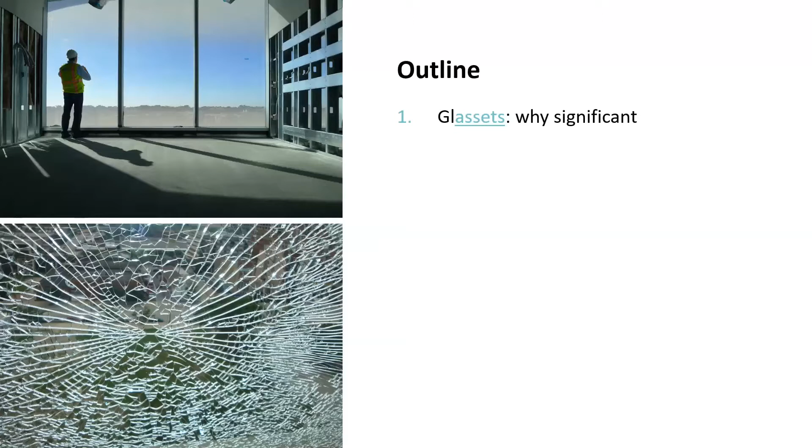Then we'll take a look at various causes of glass damage with the ever popular 'Believe It or Not.' I'm sure you'll be on the edge of your seat wondering what that consists of. Then we'll look at assessing the quote damage, or determining what types of blemishes are acceptable or not acceptable. And then we'll dive into the remedial options.

Stephen will then bring us to the point of analyzing how we can tell if the glass is still structurally adequate after polishing, and give some brief examples by way of a case history.

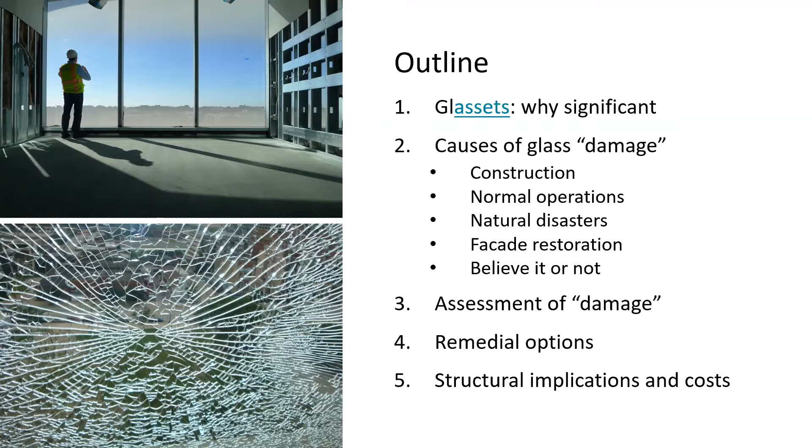So let's take a look at why glass assets are so significant. I cribbed this image of a building off the internet - it's a building in Hong Kong, but it will serve to demonstrate my purpose here. For many buildings, the envelope costs represent about 15% to up to 25% or greater of the overall building costs. So it can be very significant depending on the ornamentation and what we call jewelry on the outside of the building.

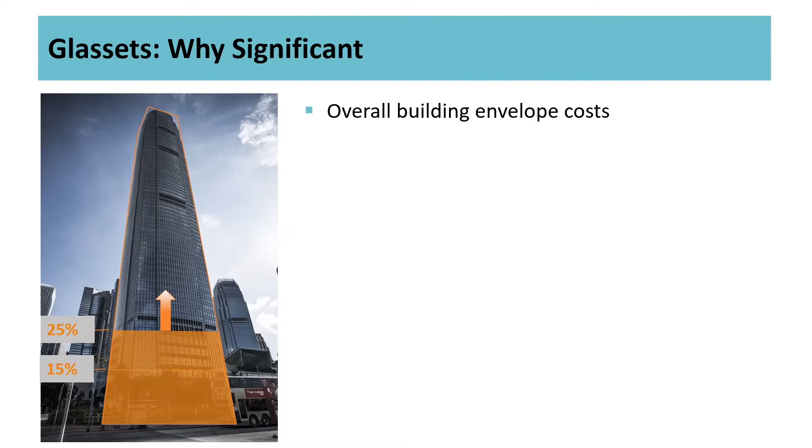A significant impact to that overall envelope cost is the glass. In recent years, for a variety of reasons, glass has gotten more complex. There's more ornamentation, more custom fritting patterns, more variety of fritting patterns on a given building, which drives up the costs. Then there are also different types of laminates, gas filling, and blast resistance requirements.

What we're finding is that on most projects, except for maybe a few recently sourced from China, there's limited or no attic stock provided at the end of the project to replace any glass that might be blemished or damaged. The glass becomes harder to match, with longer lead times, especially when sourced internationally. And the ubiquitous use of unitized systems with structural silicone glazing, and maybe some nearby high-end finishes on the inside, can make it very costly to replace any glass. So glass not only becomes an asset, but it can also become a liability.

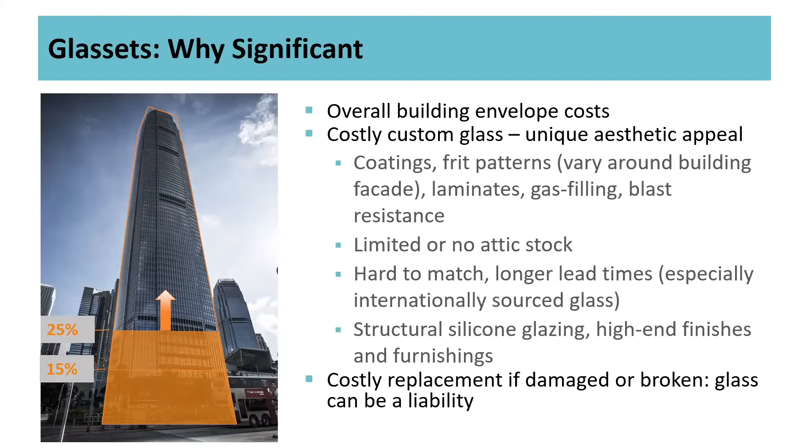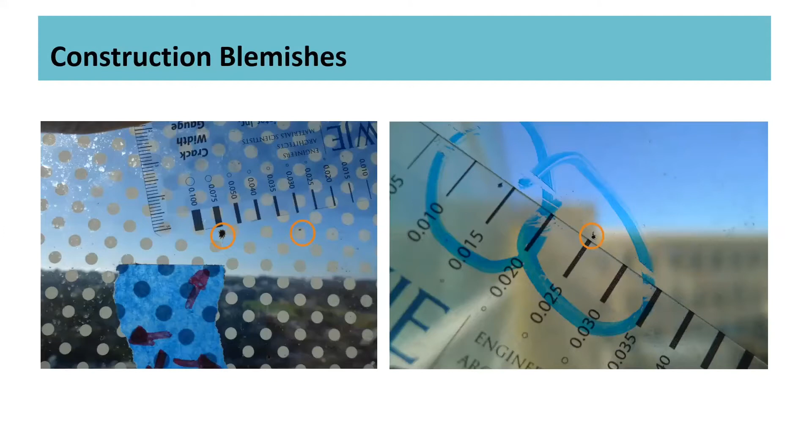Let's take a look at the reasons we're often seeing for glass blemishes. Some occur during construction. In this example, you can see small burn marks, pit marks in the glass surface - an example Stephen uses at the end of this presentation. That's occurring on glass that has a fritted pattern. The particular building had a variety of fritted patterns, which made it very difficult to get replacement glass for the project. So what caused those pits? Apparently the workers didn't think it wise to point the chop saw against the drywall and potentially damage it, so they oriented the chop saw and cut at a variety of metal studs instead, broadcasting small bits of burning metal against the glass - which of course doesn't play nicely together.

Construction cleaning, you would gather, should improve the overall appearance of the project before handing it over to the owner or developer. But we're finding that construction cleaning accounts for most of the construction blemish projects we get pulled into. Some of these seem pretty benign - we're zoomed in pretty far, and the scratches are pretty faint in these three photographs. There's some debris that's hit the glass in the left-hand photograph during construction.

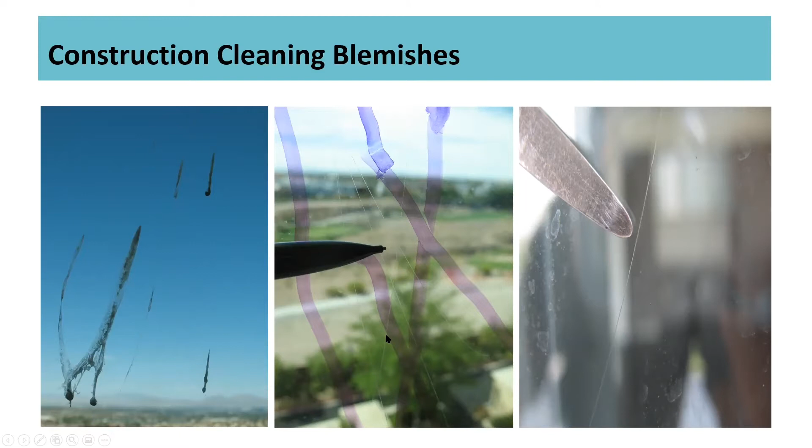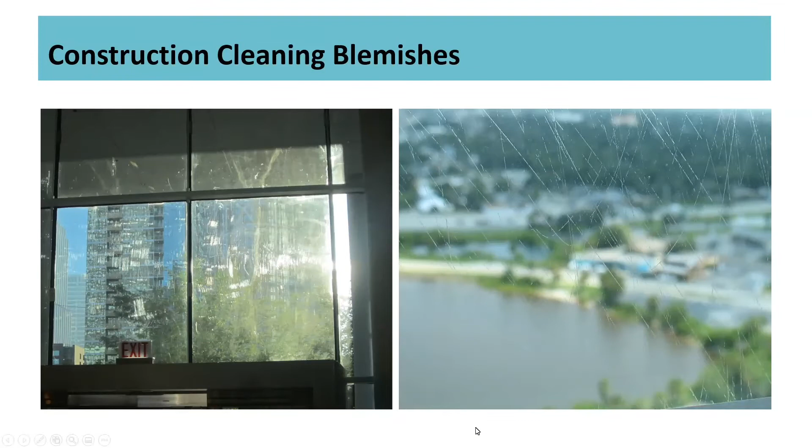But it can become very extensive. As you can see in the right-hand photo, under nondescript, cloudy day conditions, the glass scratches are very prominent. In the case on the left, we almost left the project without identifying any egregious surface blemishes until fortuitously the sun came down on the horizon and illuminated these - what we'd term angel hair scratches - on the glass, and they were widespread over the majority of the glass surface. So lighting conditions have a significant role in identifying scratches and blemishes as well.

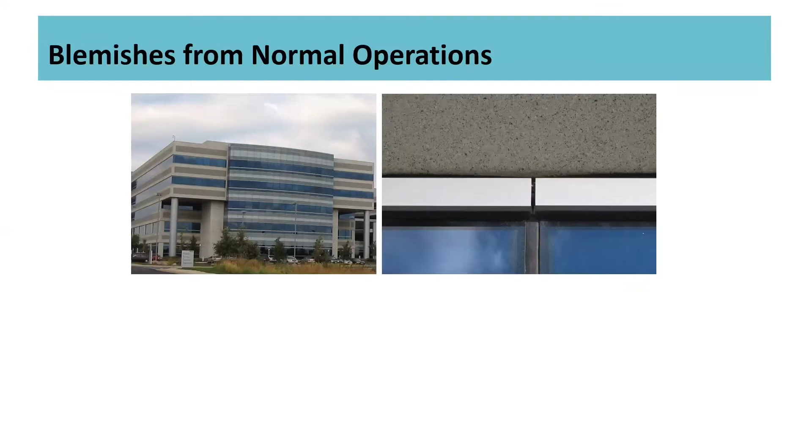Then there are blemishes that occur from normal operations. In this case, there's unprotected cementitious material - precast concrete - in the same plane as the glass. Rainwater runs over the surface of the concrete, leaches alkalis out of it, and deposits them on the glass surface. They end up looking like water spots, which you'd think might be easy to remove by normal window cleaning, but they can't. When we've looked at some of these projects in the laboratory under the microscope, we can see that the alkalis have actually etched themselves into the glass, creating a small pocket in the surface.

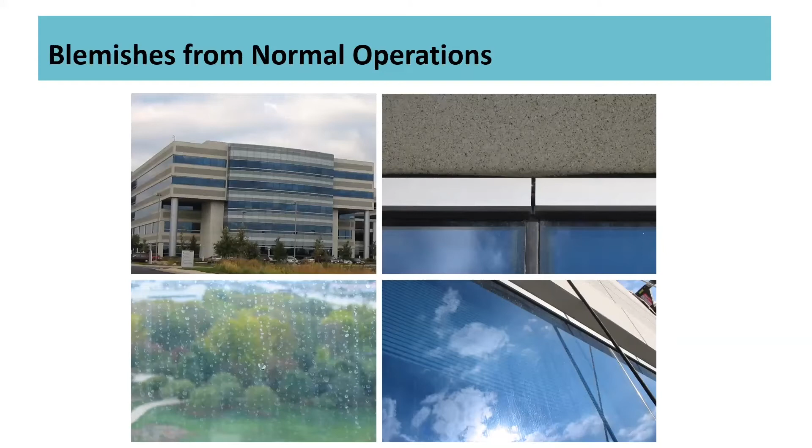In an effort to remove such water spots from the glass, this was a project where the owner-developer hired a cleaning contractor to remove those water spots. They ended up using a proprietary glass cleaning material containing silica - which we all know is a component of glass and has the same hardness as glass. They used it on the end of a handheld polisher, and you can see the overall pattern as they went across the surface. This was a mid-rise building, and the condition wasn't noticed until pretty much the whole project was completely cleaned and had these fine scratches - which ended up being very shallow, only about millionths of an inch deep.

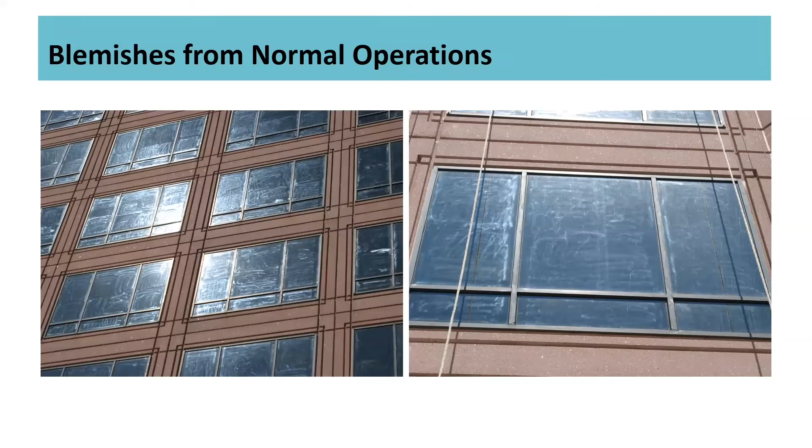Other types of blemishes can occur from natural disasters like hurricanes, tornadoes, microbursts, even derechos, a term few of us used before the last tornado season in the Midwest, where we investigated several derechos. The kind of debris or conditions you might see from natural disasters could look like this.

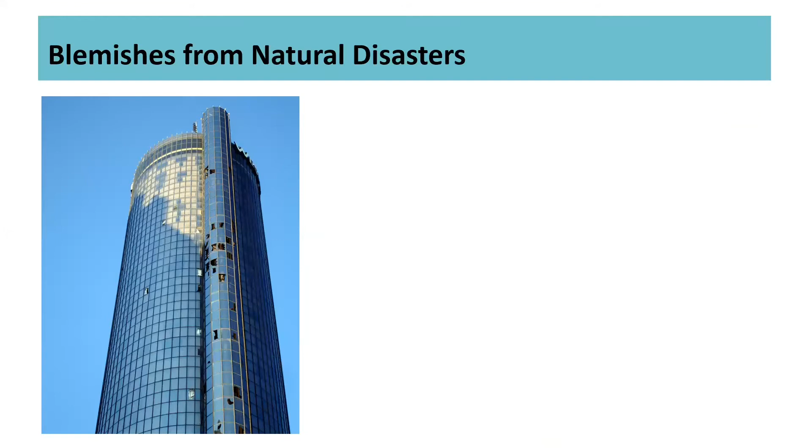But depending on who the occupant is of that particular space—if it's an office worker or a tenant who isn't just kicking up their feet and looking out the window—that type of damage could go largely unnoticed. Whereas if it's a multi-million-dollar condo owner, those blemishes become very significant in their eyes.

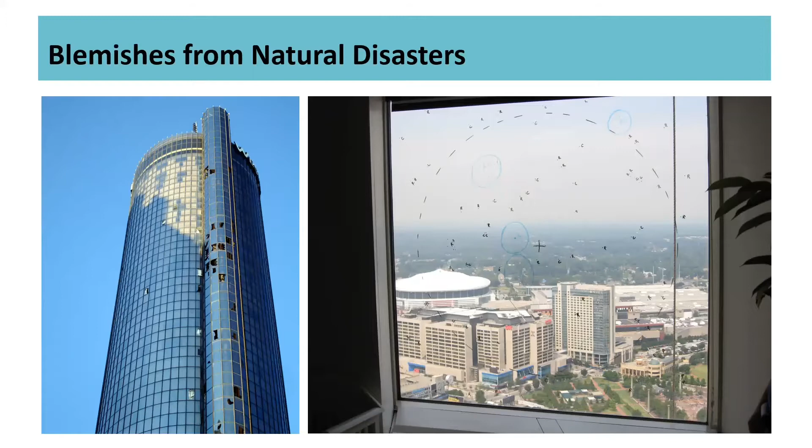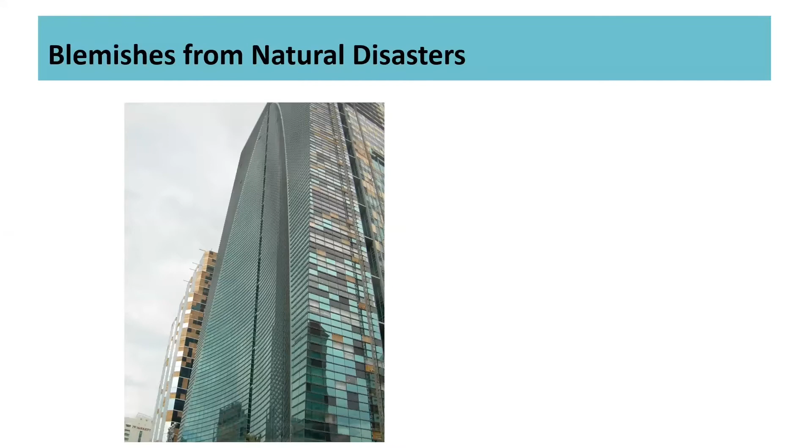Here's another condition where there was a building in the path of a relatively wimpy hurricane, Wilma, that came through Miami several years back. While that might look like different colored glass on the side of the building, it's actually boarded up windows because of extensive glass damage that occurred there. It was a brand new building under construction.

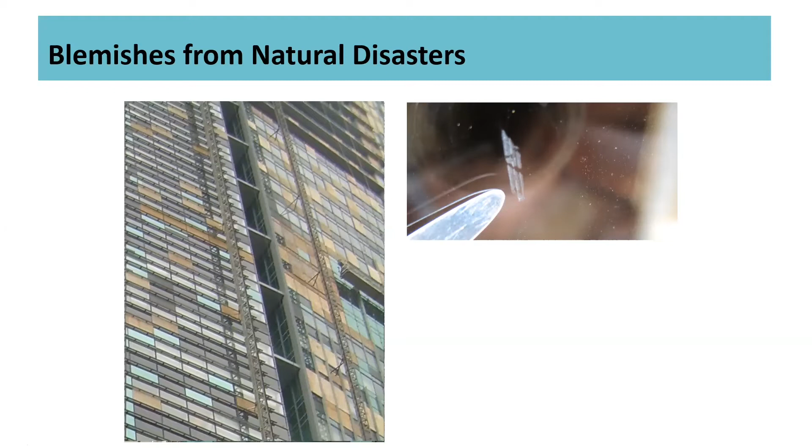Rubs are typically shallow abrasions that are generally wider than scratches, but perhaps not as deep as scratches.

Also associated with these kinds of storms with a lot of windborne debris are what we call crushes. They're a form of point blemish, resulting from small impacts of debris—in this case glass from the upstream hotel—that hit the side of the building.

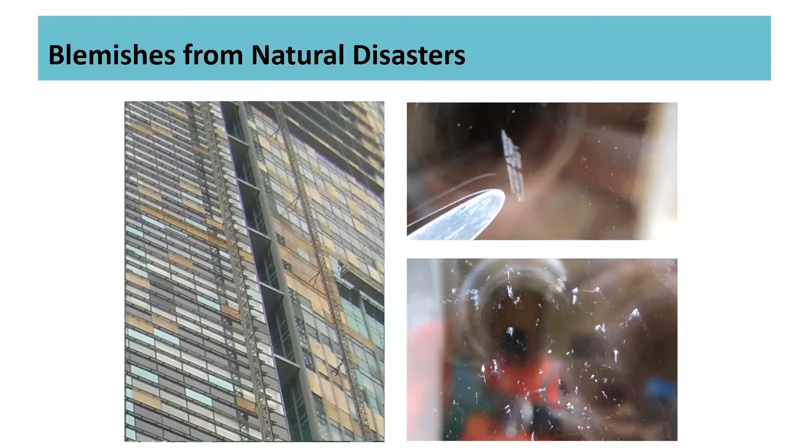We've also seen a lot of blemishes resulting from facade restoration projects, because on those projects you're using repair materials that can be cementitious, or paints or coatings, or a variety of things that can get on the surface of the glass.

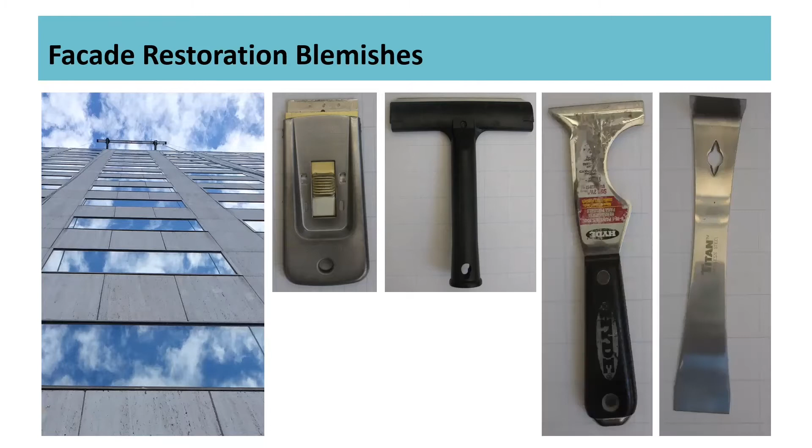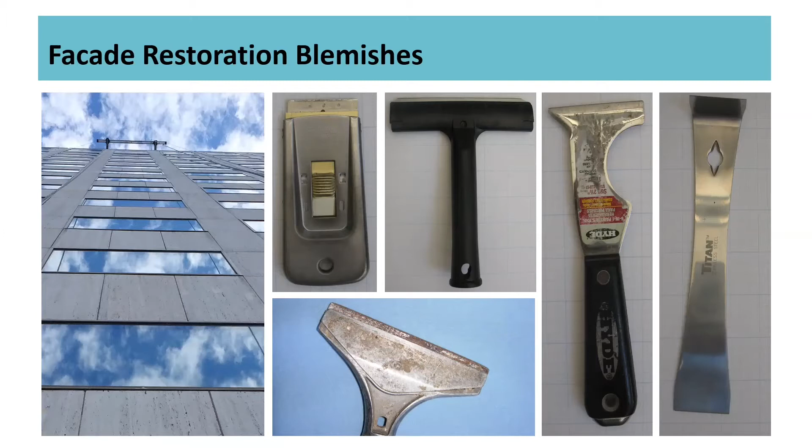But then there are pieces of equipment or tools you wouldn't expect: some 3-in-1 tool, a pry bar, and my favorite, the rusty tile scraper. Yes, that tile scraper is only really intended for use on floor tile, but it was used on a particular project, as we can see here.

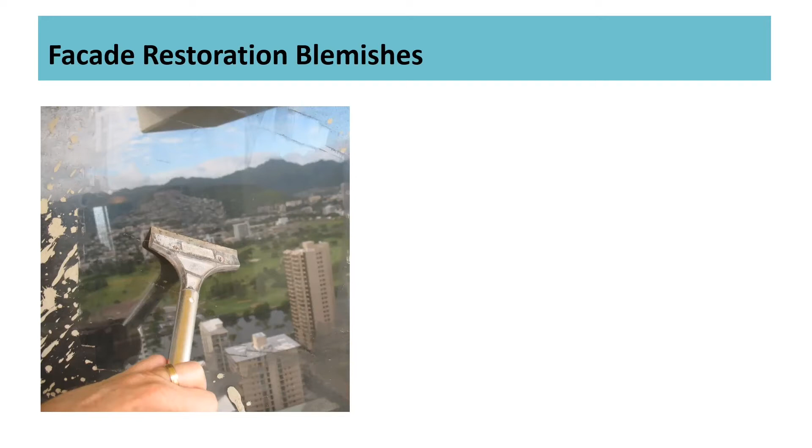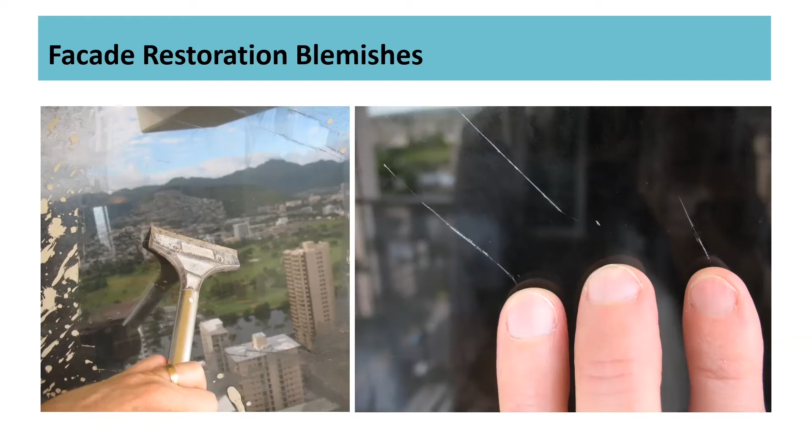The rusty tile scraper was still in the gang box of the contractor that cleaned the glass, and we still had some of the material used as part of the facade restoration project. So we broadcast that against the glass and used the same piece of equipment to remove it. Lo and behold, we were able to replicate scratches that looked very similar to the rest of the documented scratches on that project.

Lastly, under the believe-it-or-not category, there was an NFL football team out west not really accustomed to winning many games, but they managed to pull one out. An overly exuberant fan detonated fireworks in close proximity to some buildings, including the subject building, a mid-rise. As a result, you had these almost firework-looking little bits of metallic embedment in the glass, extending all the way up to and above the 15th floor of the building.

Now that we've taken a look at how these blemishes can develop, how do we determine whether they're acceptable or not? Well, there's only one standard currently available.

That's ASTM C1036. It's currently under revision—those standards are required to be revised every 5 years. There's been some discussion in the committees I've participated in about eventually developing a standard more suitable for use on in situ buildings. But nevertheless, the standard itself says it's applicable to field use, and it's the only one we have at this point in time.

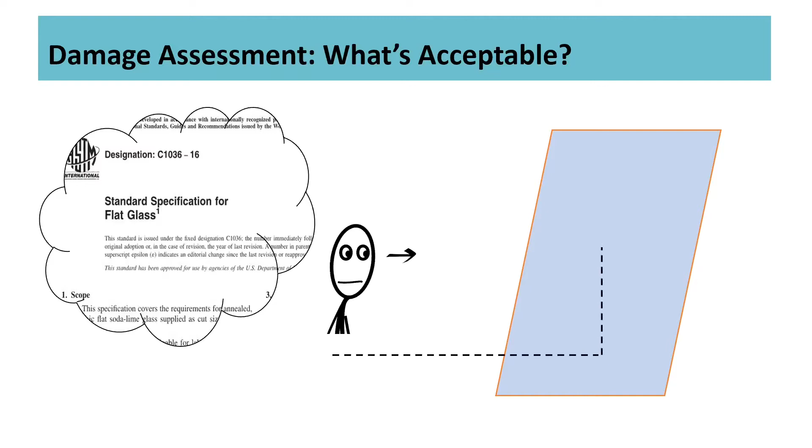So most of you are probably familiar with it, but it generally involves an unbiased observer that stands at specified viewing distances from the glass and tries to identify any blemishes on the surface. We typically have a recorder that stands at the glass so that the observer is not biased, and circles all the blemishes that the observer calls out.

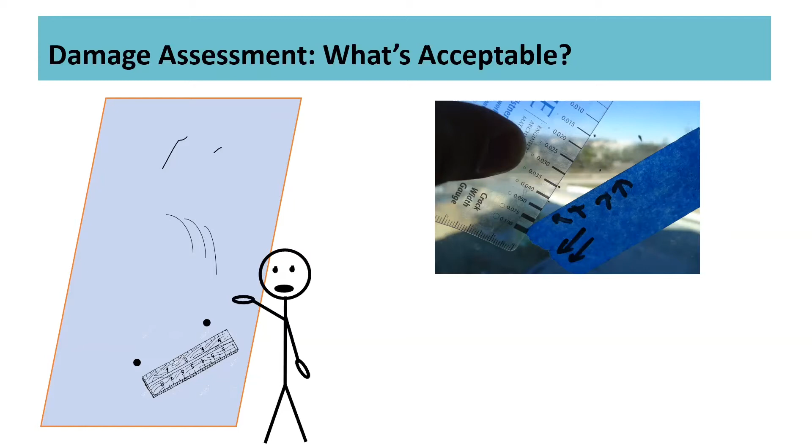The next step would be to measure those blemishes. In the upper right-hand corner, you can see we're measuring the diameter of a point blemish. And then we also measure the distance between the point blemishes, because that is part of the criteria of the standard. For our own purposes, we also try to measure the depth of the blemish, because that will give us some idea as to how much glass polishing might be required to remove the blemish from the glass surface. And we have some experience on past projects, and it would tell us whether or not we believe it will be a promising exercise to try to polish that scratch out.

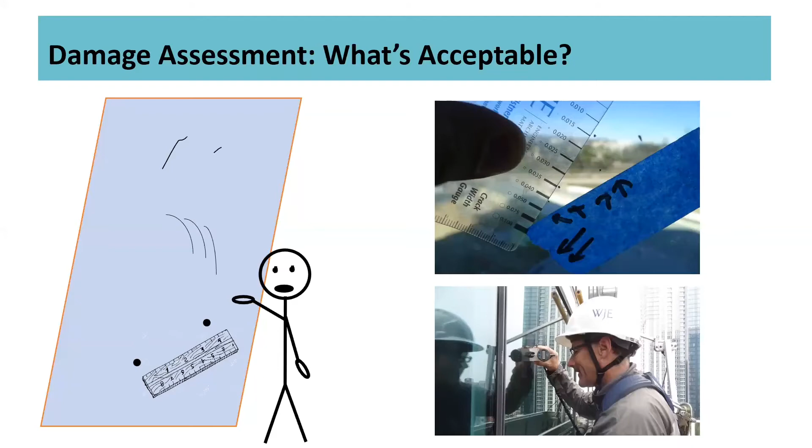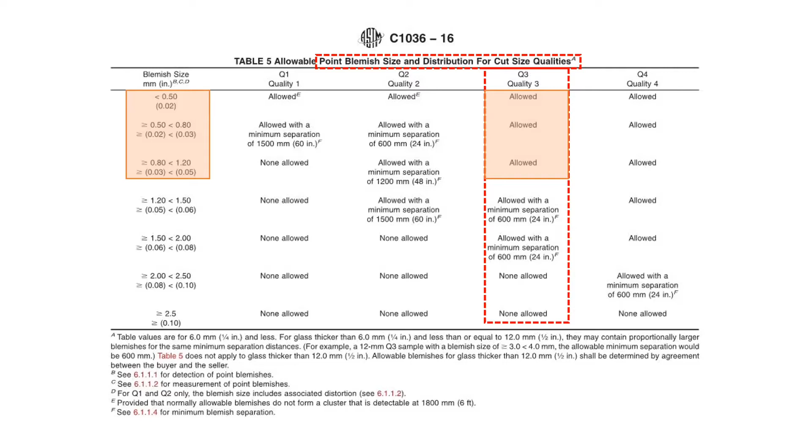Then we go into the standard itself. This is the table for point blemishes. Just about all the glass used on buildings is Q3 quality glass, architectural glass. And you can see that for point blemishes of a certain size in the orange highlighted area, they're just allowed in any number. But then further down in the criteria, you can see that some larger size blemishes are only allowed with a given spacing between them. And then if the blemishes get too large, they're just not allowed at all per the standard.

Something to point out is this particular table was developed for 6 millimeter thick glass, nominally 1/4 inch thick glass. For any glass that's thicker, they're allowed to contain proportionally larger blemishes, and there's an example given in this footnote of the table.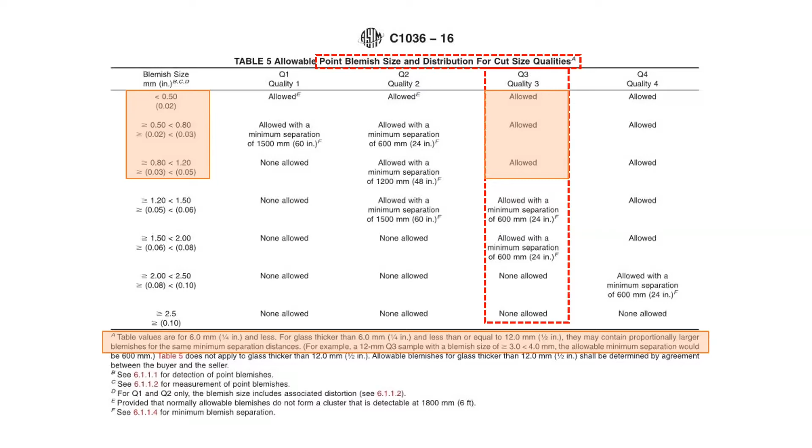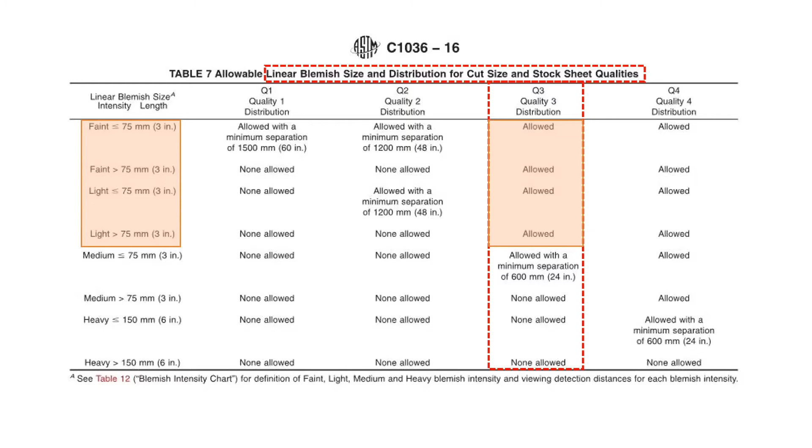Then for linear blemishes or scratches, rubs, and the like, there's a similar table. And again, there's separate viewing distances for these type of blemishes, several different distances. If you can only see the blemish from a very close distance, they may be allowed in any quantity at all. But from further viewing distances, if you can only identify them at that location, they need to be separated by 24 inches. If they're identifiable from the furthest viewing distance, they're not allowed at all in some cases.

So we've identified how we can get the blemishes, and then we've also taken a look at how to identify which are objectionable or not allowed blemishes. What do we do about that? Well, the no-brainer solution would be to replace the glass, but as we've discussed earlier, that can be a very costly proposition given the types of glass, the types of glazing, the access, etc.

Secondly, as we've seen in one example so far, proprietary cleaning compounds have caused more damage than good in most cases that we've seen, particularly cleaning compounds that have silica or hydrofluoric acid in them. So that leaves polishing, a procedure where the final process involves a cerium oxide type of finish.

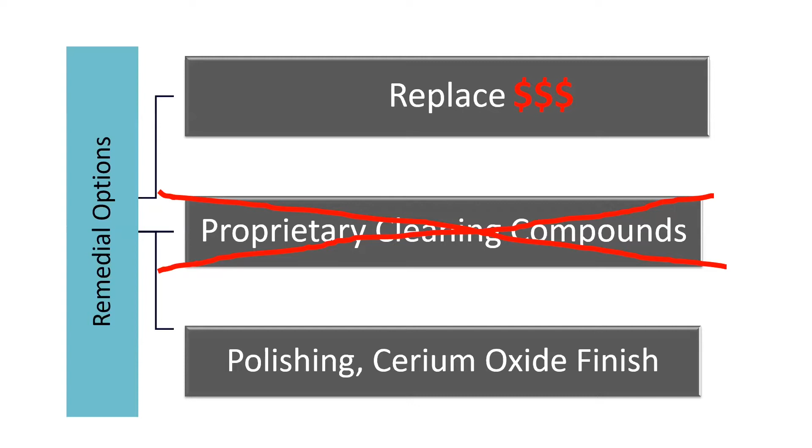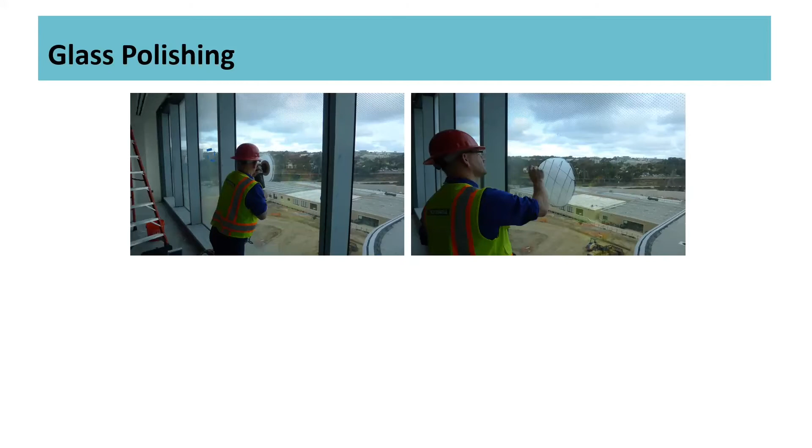So let's take a look and see how that process works. You can see the operator in this case using a handheld polisher with some sanding discs on the end that have a variety of grit to them. Starting out with very coarse grit and moving to fine grit, the operator first of all gets to the bottom of the scratch and then feathers that area out to the adjacent unpolished areas.

We also, as a precaution, take the surface temperature of the glass during these operations. Rare instances does it get up to 300 degrees, which is much lower than, say, even heat soaking glass. So there's no real danger of real stress relaxation of heat treated glass products.

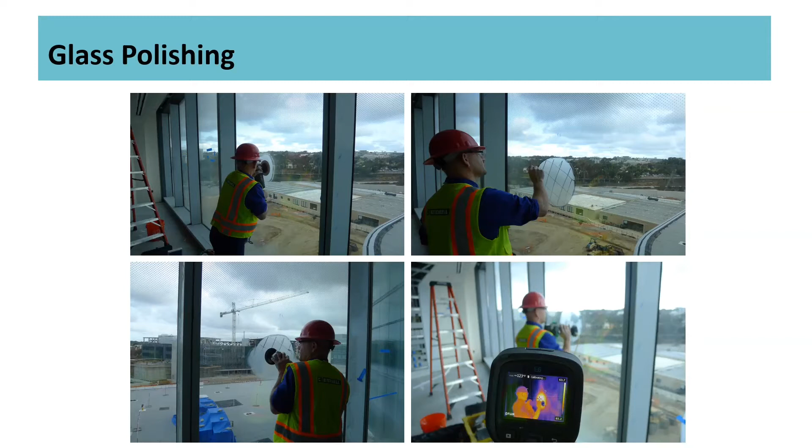And now I would like to show a video of this in operation.

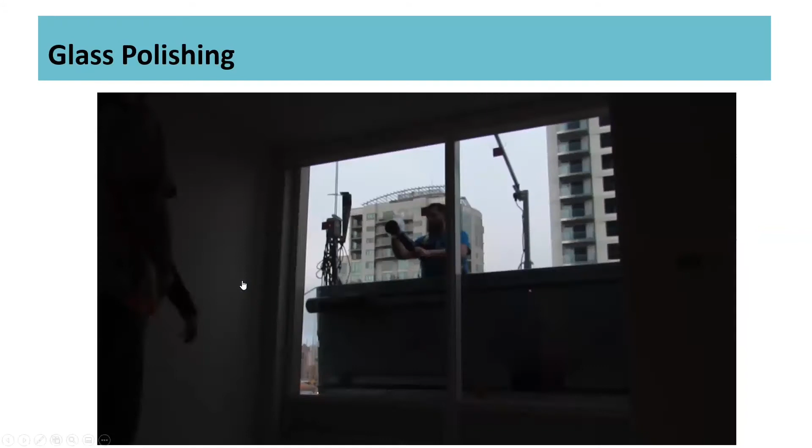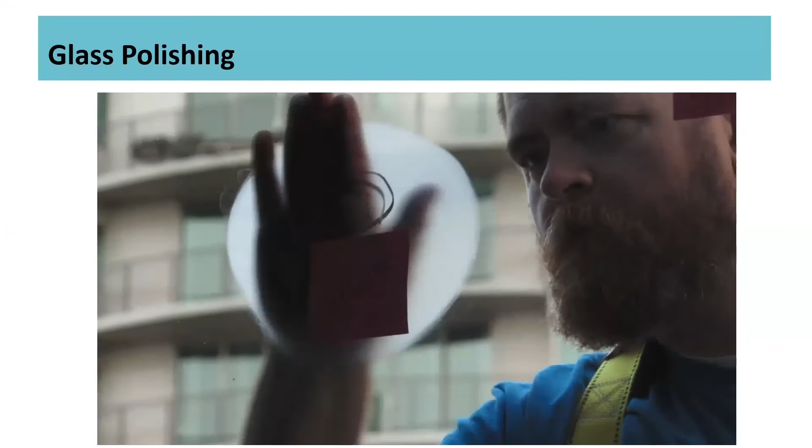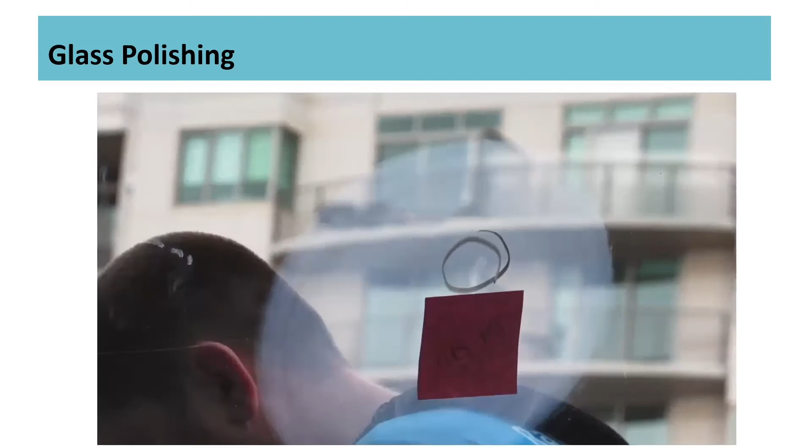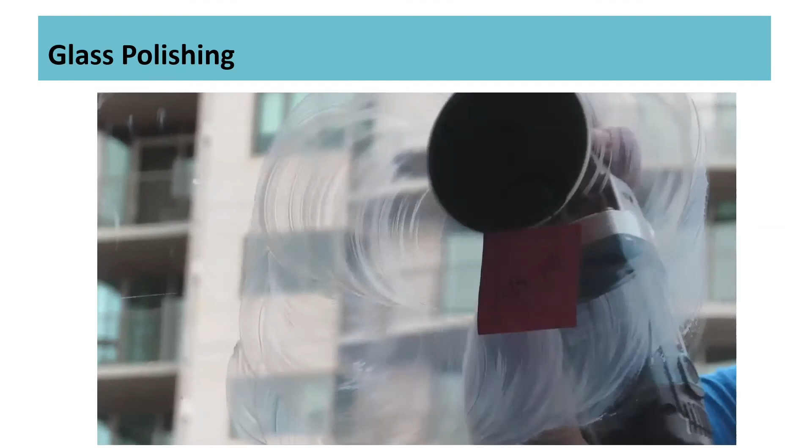Okay, here we go. Sorry about the mix up there, but you can see the operator here is starting out with a rough sanding disc, and he's roughening up the area and will proceed with feathering out to the adjacent areas. What Stephen and I have recently witnessed on a project out west that we're just finishing up is that this process is very workmanship critical. It looks like this operator could do this in his sleep, but if that polisher is not held flat against the glass surface, you can develop some ridges and areas of distortion that will be nearly impossible to get out.

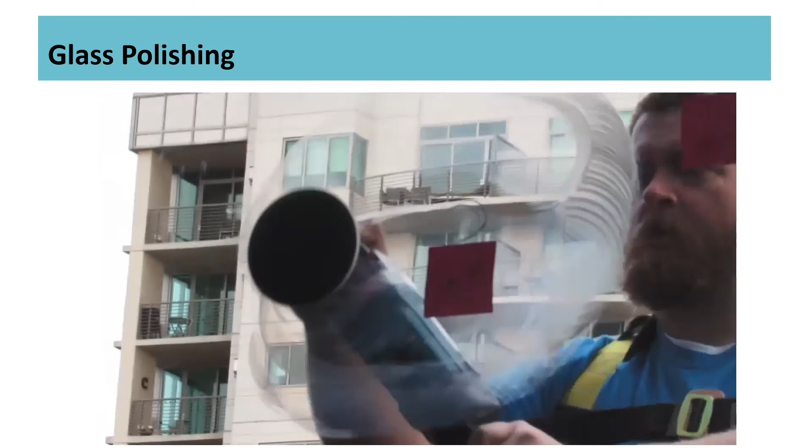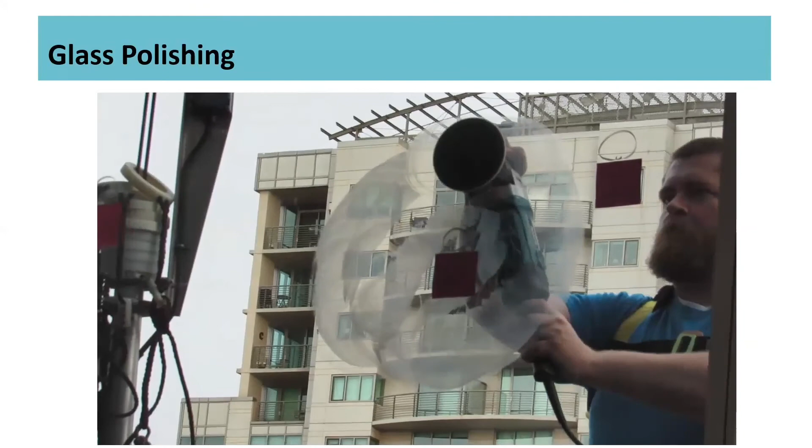So here he is in the final process using a cerium oxide solution on a felt pad on the end of a polisher to restore the glass to optical clarity. And he's making it look pretty easy, but as we've noted, it's not as easy as it looks.

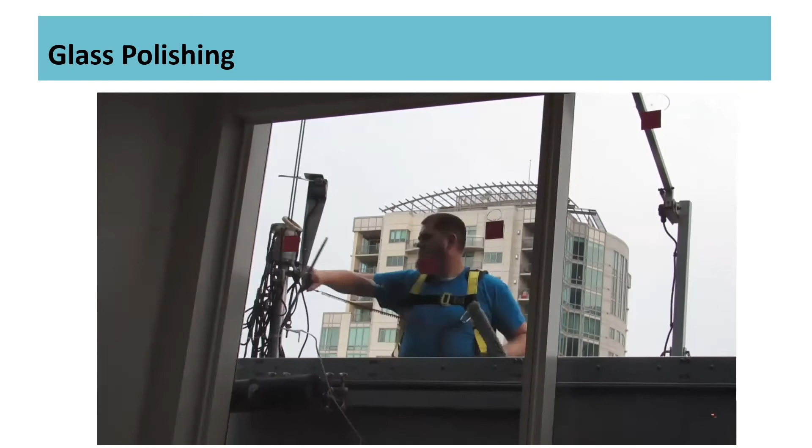As part of the final process, he's going to use a mop head and a squeegee just to make sure it all looks good. And lo and behold, he found an area that he's not pleased with. So he diligently goes back after it. There's no indication of the glass blemish after he's done.

That process with the cerium oxide paste can be somewhat messy, depending on the operator and whether you're doing that on the inside or outside of the building.

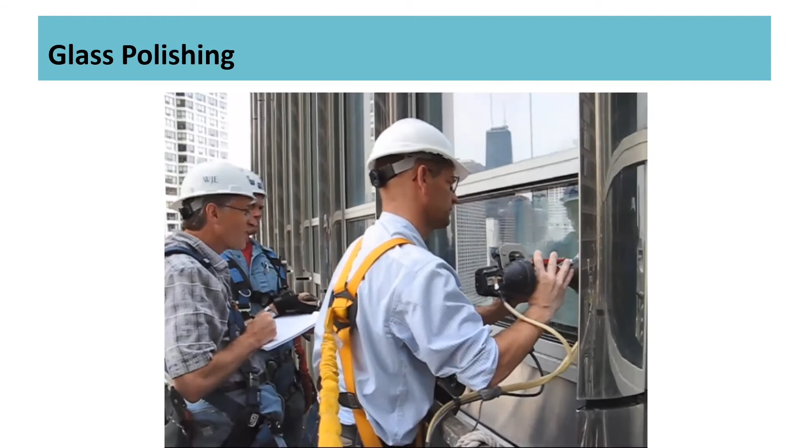So here's another method that we have used. It's an automated polishing procedure where there's a shrouded area of the device. Underneath the shroud is a spinning felt pad, and cerium oxide slurry is being recirculated under the shroud, under the pad, and back to a bucket. So this process we found is less workmanship critical.

However, the equipment is much more finicky. The equipment was developed for use on car windshields, and if precautions are not taken, you'll burn it out. It's not really meant for use for 6 to 8 hours a day on the side of a building. So that has to be accommodated.

But it's a much cleaner process when they're done. The device is pulled off the glass, and there's a very small drip of cerium oxide slurry that's easily wiped up.

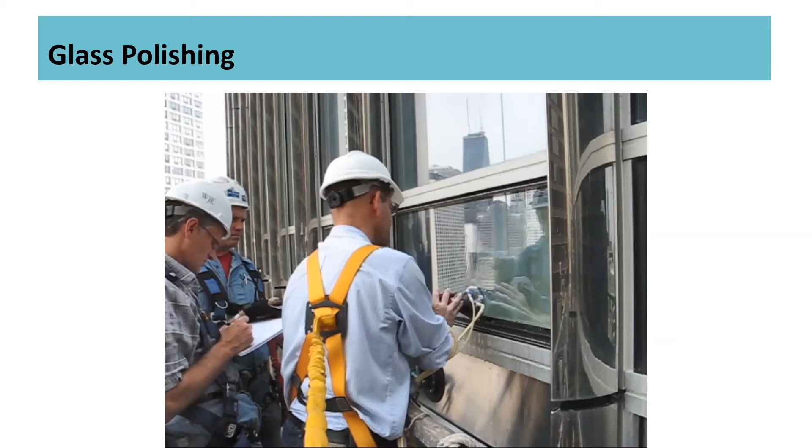And this is a project I showed earlier where the damage was done using a proprietary cleaning compound, and we used that automated procedure in these boxed-in areas. Now, this is not the final product, but you can see that there's a huge improvement in the overall aesthetics and optical clarity. That was as a result of a vertical and horizontal pass using that equipment.

It was found that another horizontal and vertical pass were required for all parties to accept the final results.

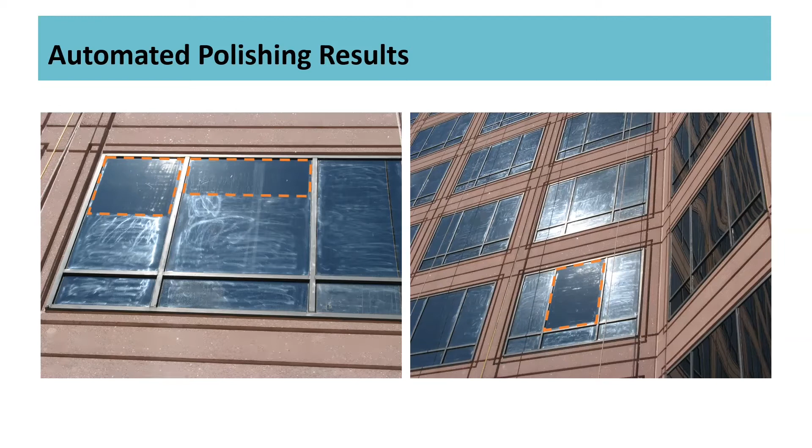With that, I will now turn it over to Stephen, who will cover the structural implications of the glass polishing. Now that we're completed, have we left the building and the glass in a condition where it's structurally adequate?

Stephen: Thank you, Mark. So I want to walk through this. Now that we've polished it and shown that we can actually repair the glass or remediate that blemish, we want to make sure that, since we were actually removing glass material, the glass can still withstand the design loads that were required when it was installed.

And so in the US, we've been using ASTM E1300 to specify glass thickness for windows in buildings. Recently, we've added a new analytical procedure to the standard that's going to allow us to assess some of these changes that we're doing to the glass, namely that we're reducing the thickness in localized areas, and correspondingly, we're likely reducing the heat treatment layer that is at the surface of the glass as well.

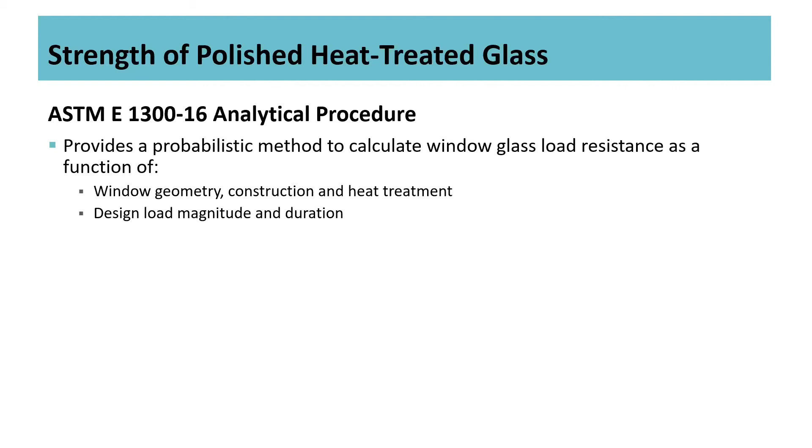And so we want to make sure that we can calculate and show that the glass still has the appropriate capacity to stay on the building.

So I want to orient us to some common language. I'm sure many of you already know some of these terms, but just in case we don't, I want to go through it. So glass that's used on buildings, at least for infill panels of windows, typically always starts in some fashion as annealed float glass.

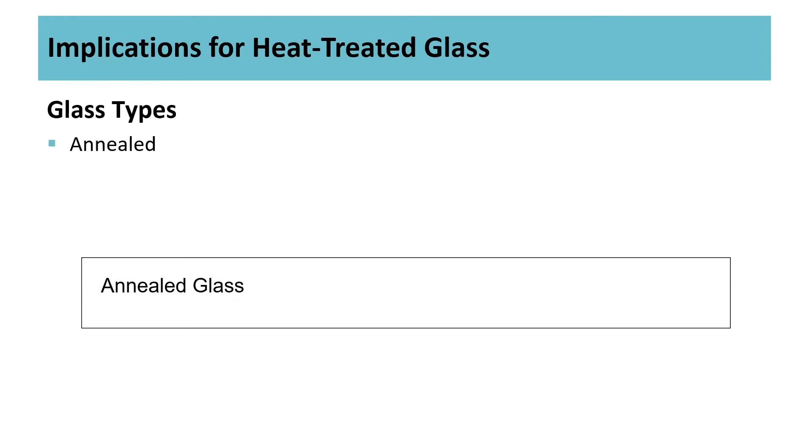And depending on its usage, it may require it to be heat treated. There's various reasons why we would use heat treated glass on buildings, either for design load resistance or for safety considerations, especially for floor-to-ceiling interior units.

And so when we heat treat glass, what we're doing is we're heating it up to a near melting point or almost softening point, and then we're going to cool it down very quickly. Depending on the rate or the intensity of that cooling, or quenching, it imparts an RCSS, a residual compressive surface stress, into the glass, and the magnitude of that has to do with that cooling process.

And so one of the things we need to know to do a before-and-after with our polished glass is we need to know what the actual RCSS is on our piece of glass. Okay, so this is measurable. There are several devices out on the market that allow us to measure this.

And in the United States, we specify two different types of heat treated glass: heat strengthened and fully tempered. Those are distinguished in C1048 based on the magnitude of the RCSS. Now, in other standards across the world, heat-treated glass is specified in a different way, but for our purposes, we're interested in what is that measured RCSS value.

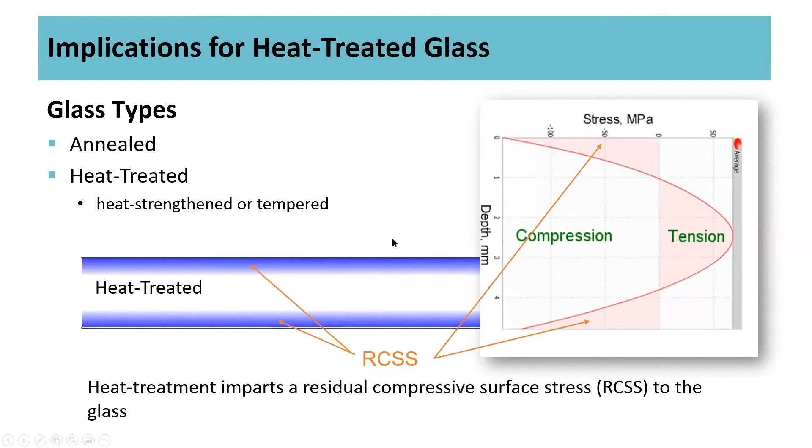We're going to come back to this one, but just know that we can measure that, and we would like to know what it is for the piece of glass we actually have on the building. So when we use the analytical procedure of ASTM E1300, I don't want to dig too deeply into these long equations, but it allows us to account for the geometry, including the long and short dimensions. We can incorporate different edge conditions or edge support conditions, and also account for the duration of the load. That's what this TD is there for.

And we can also include the RCSS. When we use this method for design purposes, the standard requires us to use the minimum RCSS values specified in C 1048. That'd be 3,500 PSI for heat strengthened glass, and 10,000 PSI for fully tempered glass. But in our experience, we found that often glass is not at the minimums, there's something above that. But we do know that for design purposes, you never know what you're going to get on the job site, so it's best to design with the minimums.

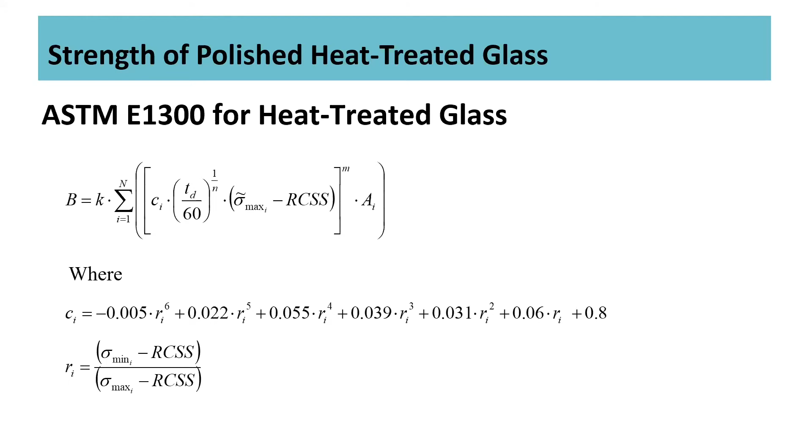But for our purposes, when we're checking do we still have capacity, we want to show that the glass that's actually there has capacity. And so we have the ability to just use the actual RCSS that we measure on the glass, both before and after. Just a few more details.

The way this is used is we would use a finite element package or some other numerical stress analysis package to calculate the stresses across the surface of the unit for various loads or the design loads. And we also get the respective areas.

The key thing with this method is that we don't go and find what is the maximum stress across the entire unit and say that's what I'm going to design to. We're going to actually take a probabilistic approach and incorporate all the stresses at all locations on the glass, and then bring those together in a stochastic analysis, and that's basically what this embodies here. If you want more information on that, I'm happy to discuss those with anybody later on.

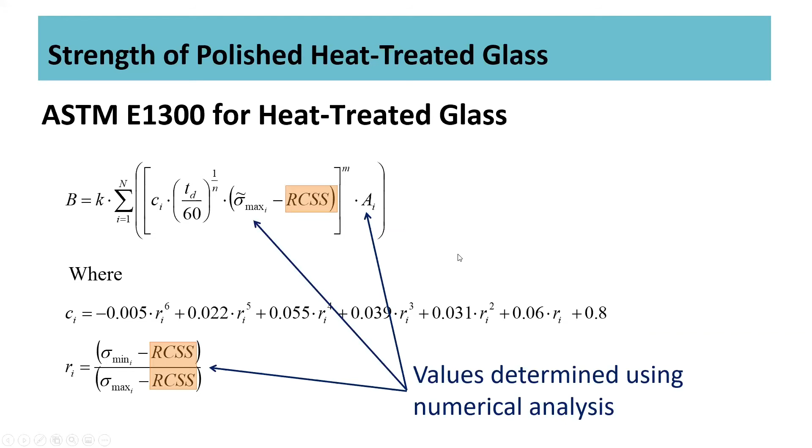So again, RCSS is here. So as we move forward, if you want an example of how this would work, I'm going to start with some piece of glass. I'd go and find the rectangular dimensions and the thickness of the glass. I would know the design load, and I would perform some numerical stress analysis.

And so we get our nice rainbow pictures out of these, and I'm sure many of us have seen before. Then we can take the data from that analysis and plug it into our glass failure prediction model, that equation I showed previously, which, for as nasty as it looks, you can actually type all those equations into Excel and do the calculations there. So we don't have to have fancy software to perform that calculation, other than the fancy software that requires us to do the stress analysis to begin with.

And then what we're looking for is either we're greater than or less than 8 in 1,000. E1300 specifies this cutoff point, saying that if our calculated probability of breakage is less than 8 in 1,000, then our design works. If it's greater than 8 in 1,000, then we have a problem. So this is going to be our check that we need to show that post-polishing, we still have a probability of breakage that doesn't exceed 8 in 1,000. I'm happy to discuss any of this process later in more detail, but we're going to leave it there for today.

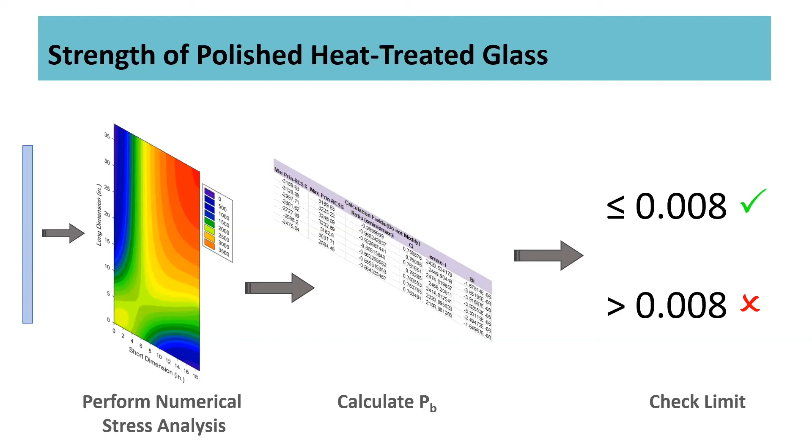So moving forward, when we polish glass, so we have this blemish, when we polish heat treated glass, what's going to happen to the glass physically? So we need to understand that. One thing is that we immediately recognize that we're removing glass material, so the thickness of the glass has changed in the area that we polished.

Now, in many of the projects that Mark and I have worked on, typically the places in the glass that need to be polished is not the entire surface. Mark showed one of his examples where it was effectively the entire surface, but usually it's in some smaller location at a particular point on the glass.

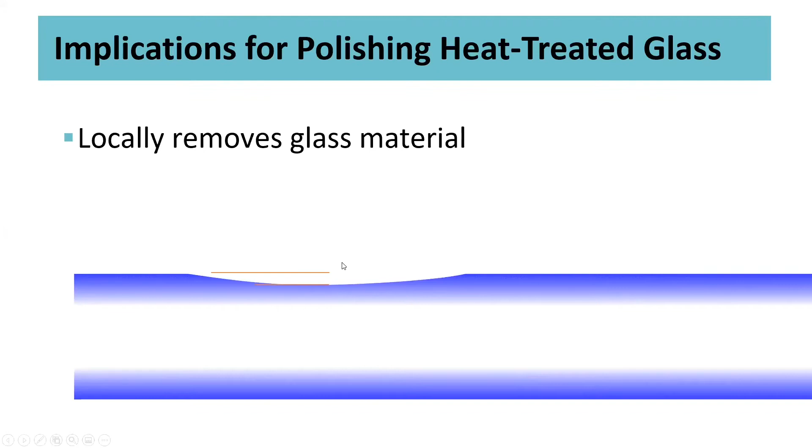In addition to removing the glass material itself, we're going to locally reduce that RCSS as well, because we know that was a function of its depth through the glass. A few issues come to mind: that stress had to go somewhere to balance our internal stresses, so we need to be careful about what we assume. Is that going to be the change?

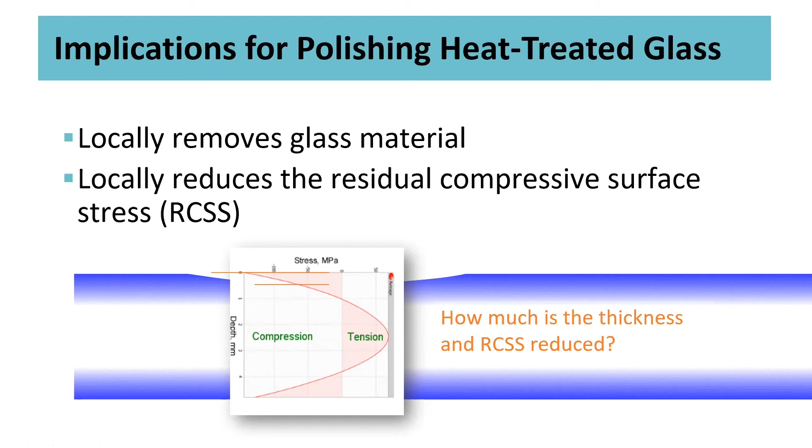We need to know how much the thickness was, and it'd be nice to know how much RCSS, through direct measurement, was reduced.

Mark mentioned we wanted to walk through a case study to illustrate this. We've been measuring the thickness and the glass RCSS, residual compressive surface stress, using an optical device called a SCALP, which plugs into a computer via USB and performs the measurement, giving us a nice fancy drawing of that stress profile through the thickness of the glass. That's where our picture came from previously, from this device.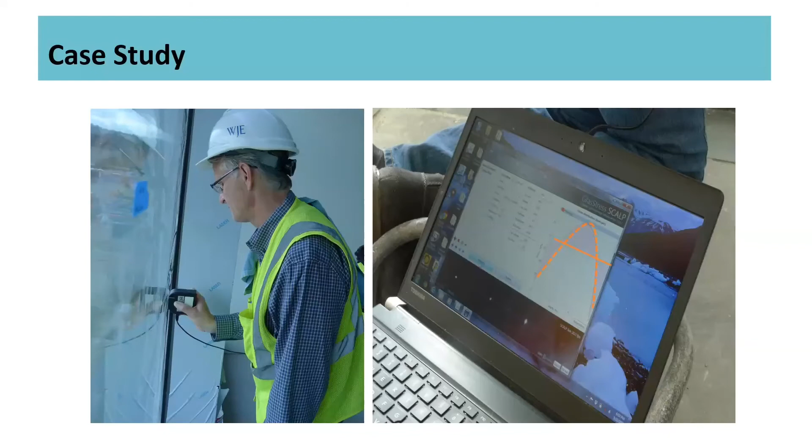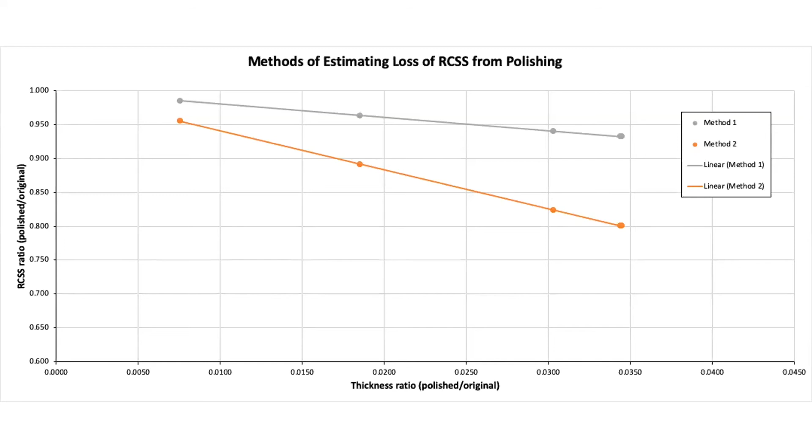With that information, we were brainstorming, from before we polished, what could the RCSS end up being? Before I get into that, let me orient you to my axes.

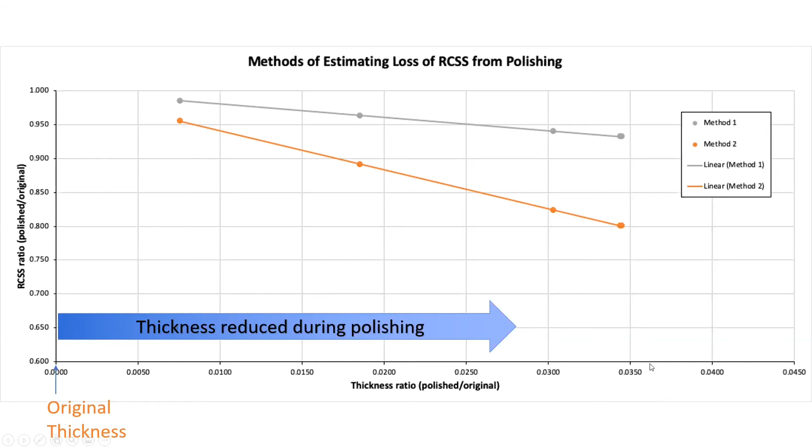On the x-axis, I'm showing a ratio of the thickness being reduced. Think of it as our original thickness, and as we continue reducing through polishing, we move in this direction, so this is the most we remove. Remember, this is a ratio, not actual dimensions. On the y-axis is where we started, the original RCSS, and as we polish, it reduces going down.

For this first gray line that we talked about, we anticipated that if we just used the graph we had measured, we could estimate or extrapolate where the RCSS would go. What we found is that, as anticipated, this does not address the rebalancing of stresses locally through that thickness, because if we still have the full RCSS on one side, it has to rebalance. So we attempted a bit of algebraic magic to come up with another model to address that.

That's this orange line. We wanted to see how this compares, and when we actually measured it, we found that at first, when we'd barely taken anything off, it was reasonably close. But we found very quickly that as we removed more glass material, the RCSS dropped significantly faster than even our algebraic model predicted. So there's more going on here than we can predict right now with our rudimentary model.

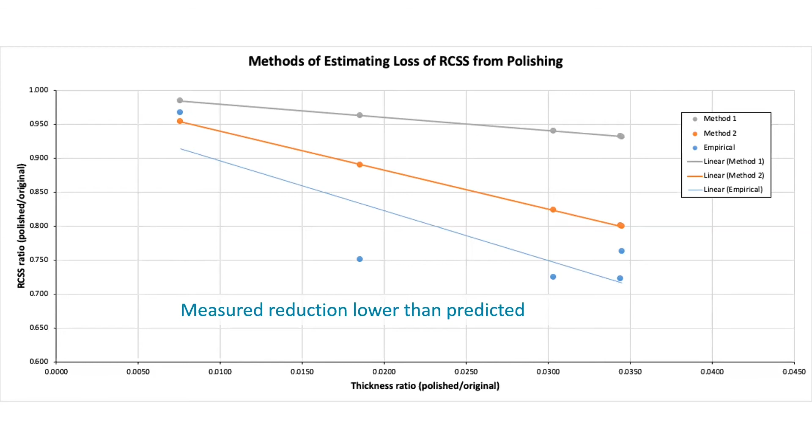Now that we know what the change in thickness was and what the change in the RCSS is, we want to go reapply our glass failure prediction model. In this case, our max reduction was 0.008, close to that 1/100 of an inch I was talking about. And we had a corresponding reduction of 28% in our RCSS. That's a pretty big difference.

So certainly if we were at the minimum of 10,000 and we reduced it 28%, we're clearly not in our minimum 10,000 range. It's also worth noting that when we polish glass, we're typically not doing the entire unit. We're using some localized area to try to get rid of these blemishes. So it depends, again, on a case-by-case basis what's reasonable or not reasonable.

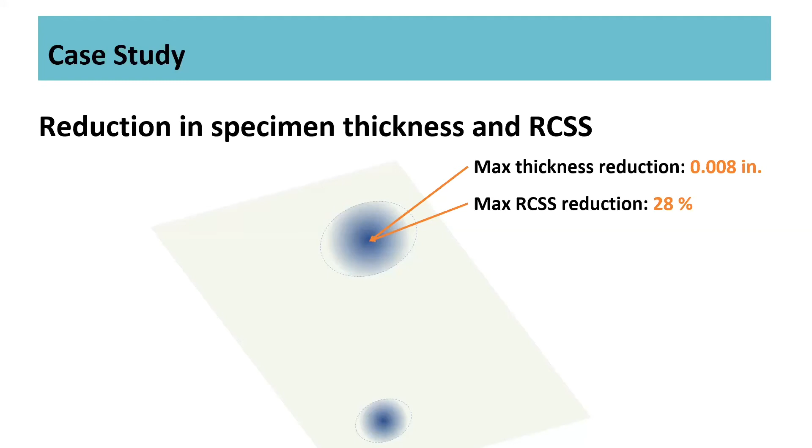For our analysis purposes, it gets kind of iffy to try to do plate analysis with a varying thickness in the middle of it, and we felt like that's probably just unnecessarily complicated. Why don't we just assume the entire plate now is the reduced thickness and has that reduced RCSS, and do our analysis based on that information.

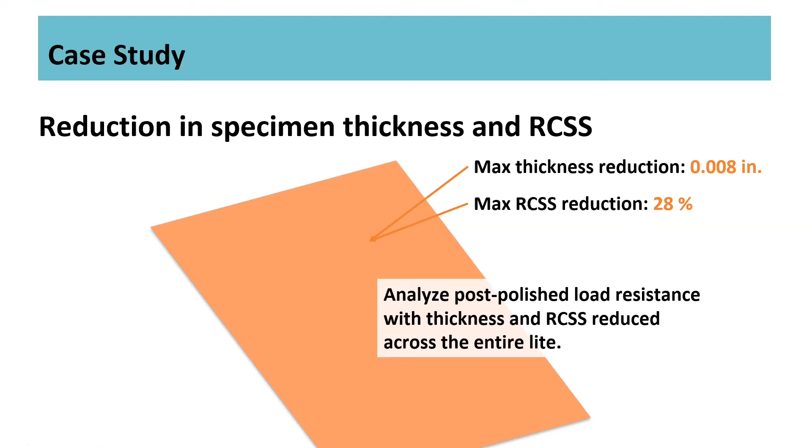This way we know that whatever number we're getting is likely way lower than it actually is, since often we're just doing a small area. It's likely going to cover any other secondary effects that our relatively simplistic approach so far doesn't address. We feel like we're in pretty good shape by making this assumption.

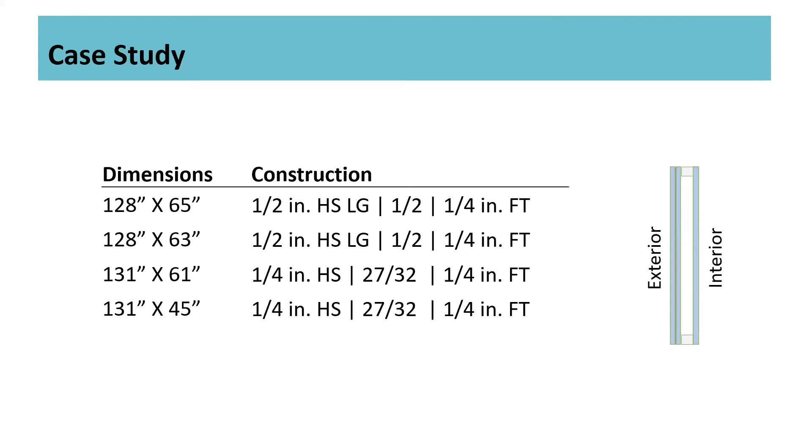So with that, let's put some numbers to it. This case study goes back to that chop saw blasting hot metal into the interior fully tempered piece of glass. What we're focused on here is this 1/4 inch fully tempered interior piece of glass, and what we were trying to get rid of was something not unlike weld splatter that was coming off of that chop saw.

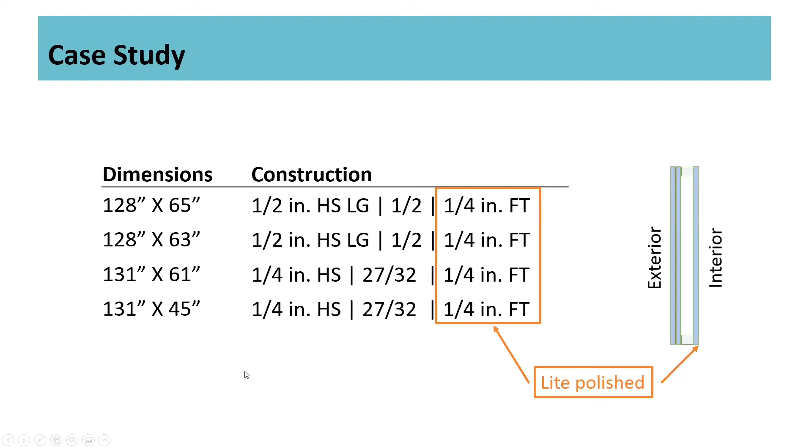And we have various different lite sizes as we would anticipate on a new structure these days. Because of the age of this building and when the actual initial designs were, it was likely that the glass was designed in accordance with the basic method.

This is what is now called the basic method of E1300 in 2016, corresponding to the previous editions. This was kind of the standard where we go into those crazy squiggly charts and get a non-factored load, then multiply it by a glass type factor, and then do our load sharing for insulating glass units.

For these particular units, we went ahead and did that just to double check: were these things actually originally adequate to begin with? We had access to the wind loads based on the original construction drawings, and we found that indeed they were, but especially with this first one, they were quite close.

There wasn't a whole lot of residual capacity according to the basic method. So that would cause some concern: if we're reducing heat treatment or reducing the thickness, is that still going to check? It would have been nice to just continue to reuse the basic method to calculate this, but the basic method doesn't allow that because we have all these pre-calculated charts in there.

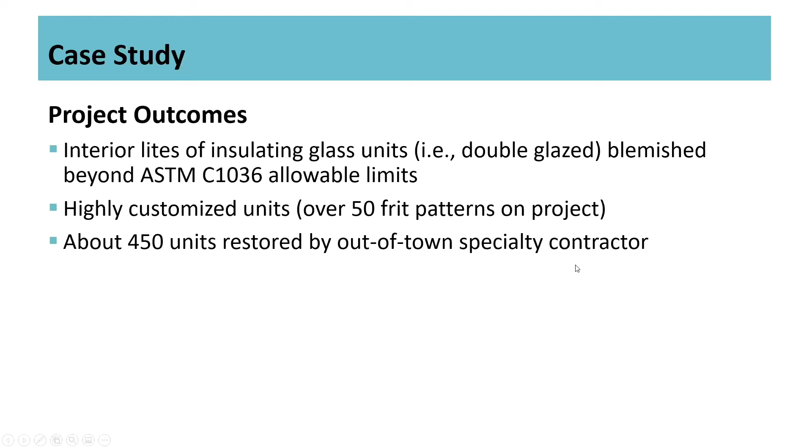These happen to be highly customized units. There were over 50 patterns on this project. You saw at least 4 different sizes of units we were addressing, and they had damaged over 450 of these units before they got a hold of that chop saw guy and stopped him. We actually had an out-of-town contractor willing to travel to locations to do this restoration.

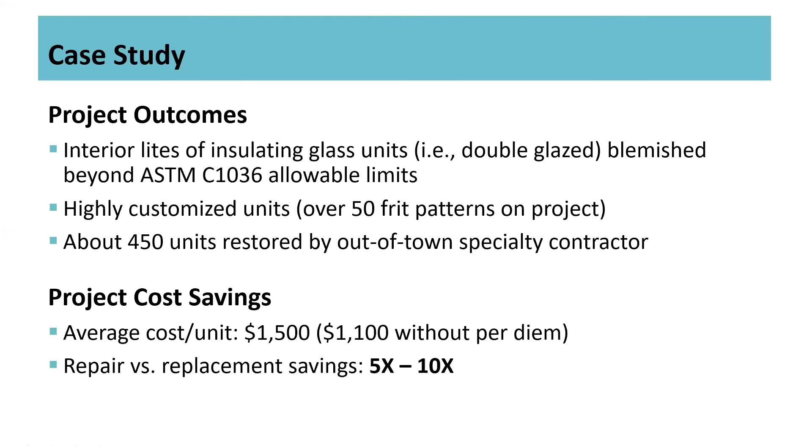Project cost savings. As Mark indicated before, these really nice facades can be a liability, and they are quite expensive, especially if we start shutting down roads or getting cranes involved to replace this. Certainly a significant cost at the order of 450 units, that could be the entire building or at least half of it. So in this case, we reduced the cost down to about $1,500, or without per diem, $1,100 per unit. That's still a big number, but a whole lot less than replacing the entire facade - a 5 to 10 times reduction in cost.

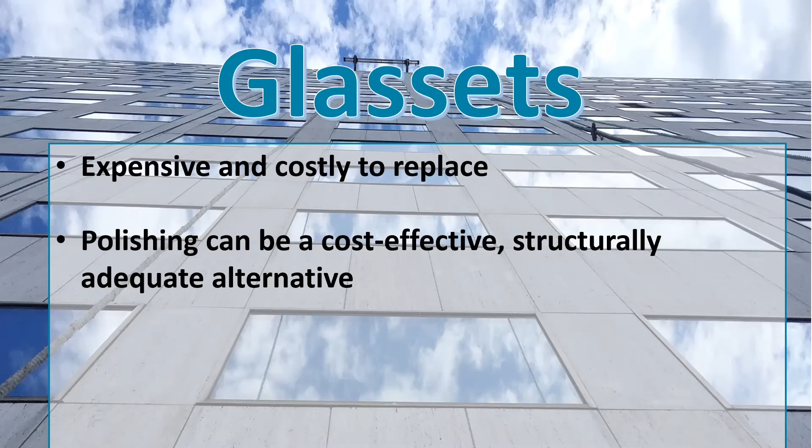So what are our takeaways from this? We'll sum up with our key points. Number one, these glass facades, while beautiful and striking, making our buildings stand out, are expensive and very costly to replace - sometimes more costly to replace than they were initially to install, because of site conditions and so on. The polishing can be a cost-effective method, and it can still be structurally adequate, so we don't have to go in and replace all of it.

Again, this is a case-by-case thing, so we recommend you perform a mock-up and test measurement, figure out what kind of glass you have, and make sure when we're done you're going to have the look you desire. One other thing Mark mentioned earlier is that this is highly workmanship sensitive. You have to have the right professionals on site to get a good product, because if you get somebody who hasn't really done this, they can grind a lens into your window, and then you really do have to replace it because that's almost not fixable.

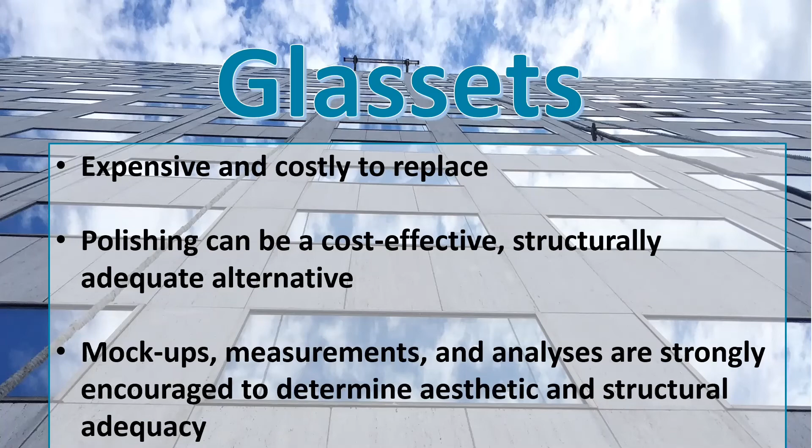Yes, agreed. Thank you, Mark and Stephen. Let's dive into some of the questions we've received. First one: have you ever implemented an epoxy filler, such as that used in windshield crack or chip repairs?

Mark, you want to take that one, or you want me to? I can take that one. Most of these are scratches, longer scratches, more egregious scratches - it's not the typical single piece of debris that hits your windshield that we're trying to repair. Furthermore, the polishing process is a more accepted restoration technique by glass producers and fabricators of architectural glass, whereas epoxy filling is more of an automotive repair technique.

Okay, thank you. Another question: can you, and how do you, determine if a blemish is pre-installed or post-installed in origin?

I can take that one too, Stephen. Yep, it's mostly anecdotal. If we can try to replicate the scratches on site using the equipment we know was used or available at the time, and if it's not possible to do the replication on site, we'll bring the glass sample into our laboratory. Right now we have about a 5-foot by 12-foot IGU that we've been experimenting with in the lab, and then we'll bring it outside on an A-frame and take a look at it under ambient lighting conditions, which have really, in this particular project, revealed a lot about how the scratches probably developed. So it's more anecdotally putting it together forensically rather than being able to identify something materially and date it that way.